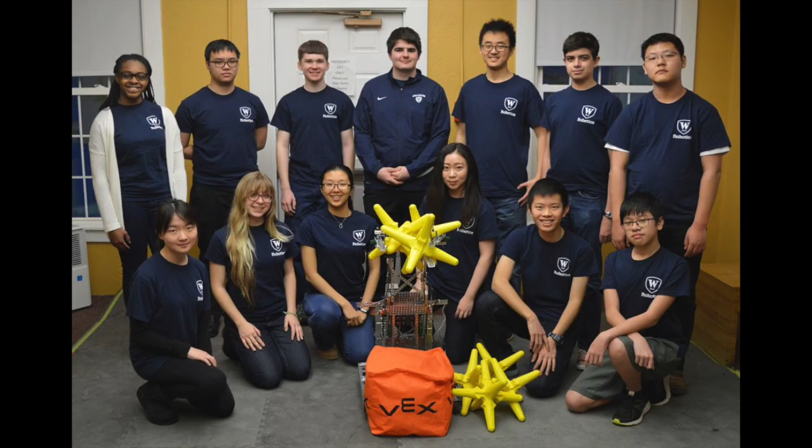Hi, my name is Kome Kadoya. I am the leader of Team 3157, the Williston Northampton School's robotics team, based in Easthampton, Massachusetts.

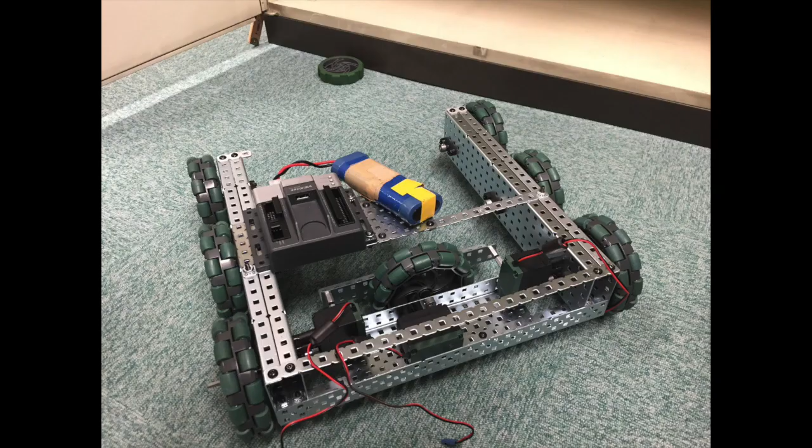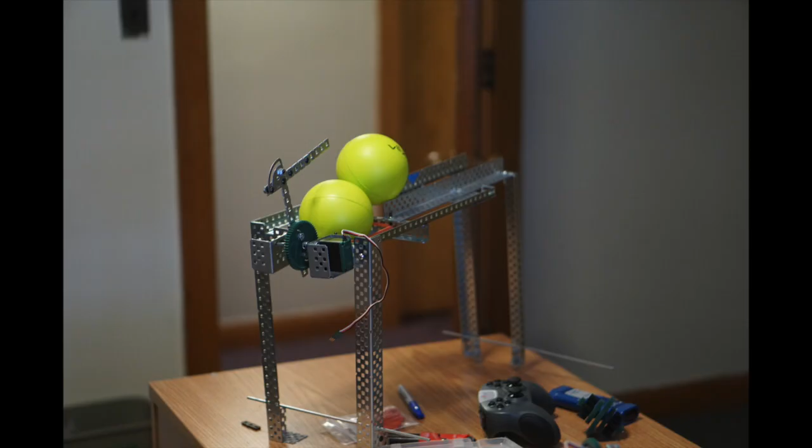Nothing has had a greater impact on my life than Vex Robotics. My involvement in Vex for the past 6 years has taught me so many valuable skills that I could not have learned anywhere else, and it has shaped my future. This is why I wanted to share our team's journey to the World Championships and explain how it helped me discover my passion for engineering and robotics.

My first experience with Vex came in 7th grade when I gathered a few of my friends to start a robotics club at my middle school in Japan. With only a clawbot, we signed up for the only competition available to teams in Japan, the Asia Pacific Regionals.

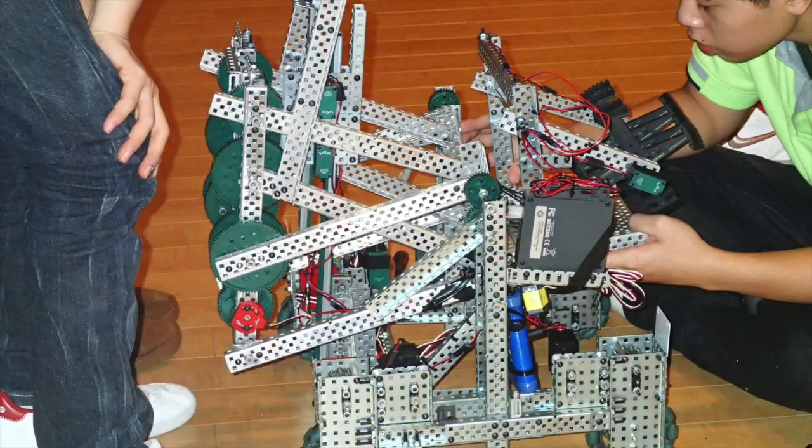As you can imagine, most of the teams in this high school regional competition had amazing robots that could accomplish every task in the game quickly and reliably. I was astonished at the amount of complex problem solving that could be done with such a simple set of parts. At this moment, I told myself that one day I would get to the World Championships.

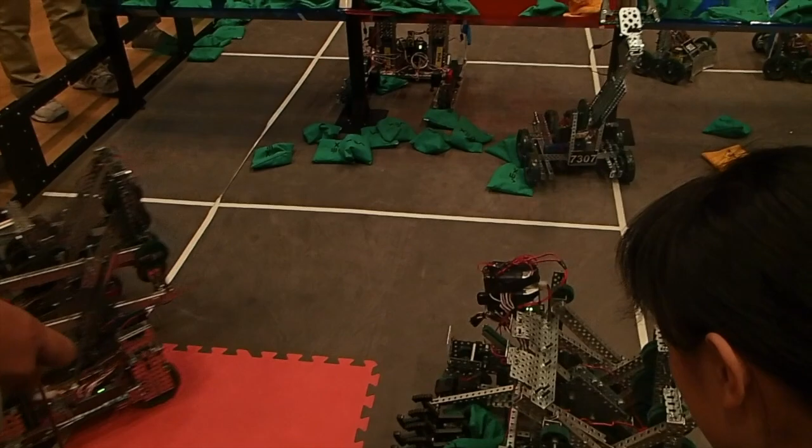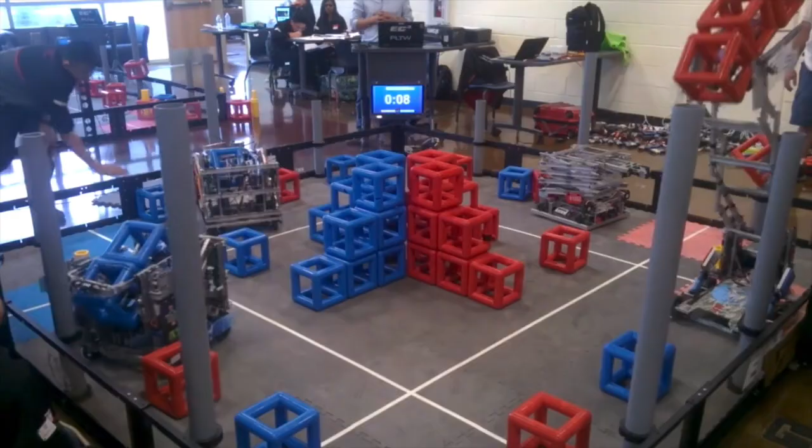Fueled by this new goal, I came back next year with a bigger team, and every day after school for a few months, my team and I designed and created a robot for that year's game, Skyrise. I learned so much about the different kinds of lifting mechanisms and how each one expanded and contracted to fit inside the 18-inch box that the robot had to start in, while also building amazingly tall skyrises.

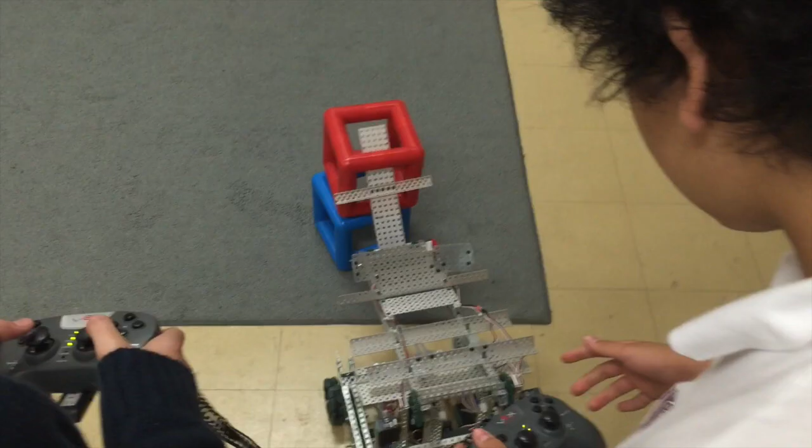I also started to grasp the basics of programming in RobotC, and although we failed miserably due to our motors overheating at competition, I learned a valuable lesson in understanding the strengths and limitations of our hardware, and the importance of consistency and reliability.

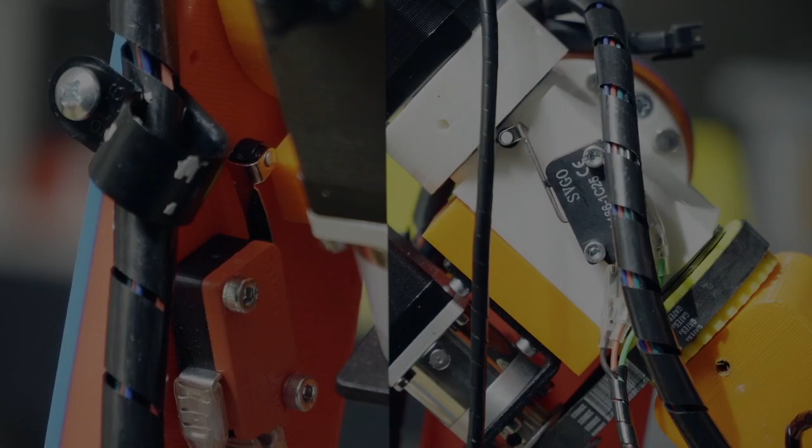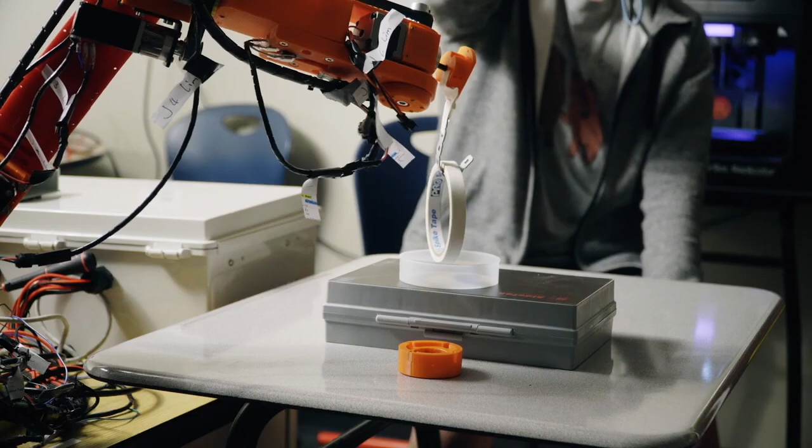My first 2 years involved in Vex were enough for me to decide on engineering as my future profession, and the experience set me up very well when I came to the US to attend high school. As the high school I attended had just switched from FRC to Vex, my first year there, I was able to help introduce everyone on the team to Vex.

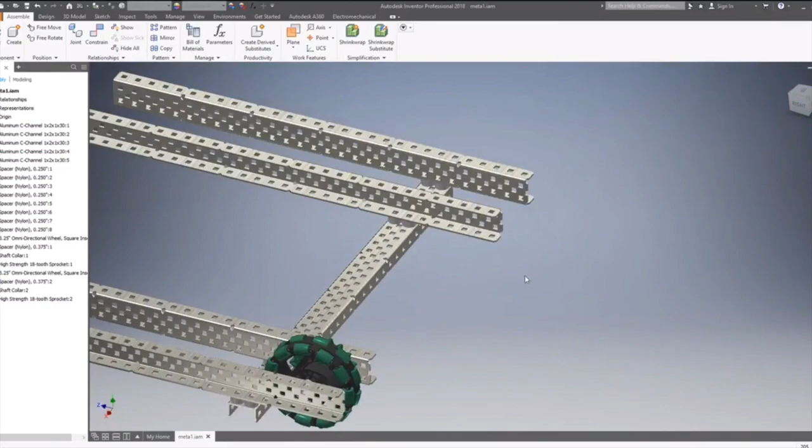This was also the first year I started to use CAD software, which I found to be a far better way of communicating robot designs compared to simple drawings. We found that making virtual designs and making changes in CAD would be a valuable tool, as we didn't have to physically build or cut anything, and we could easily revert back if we didn't like a change we made.

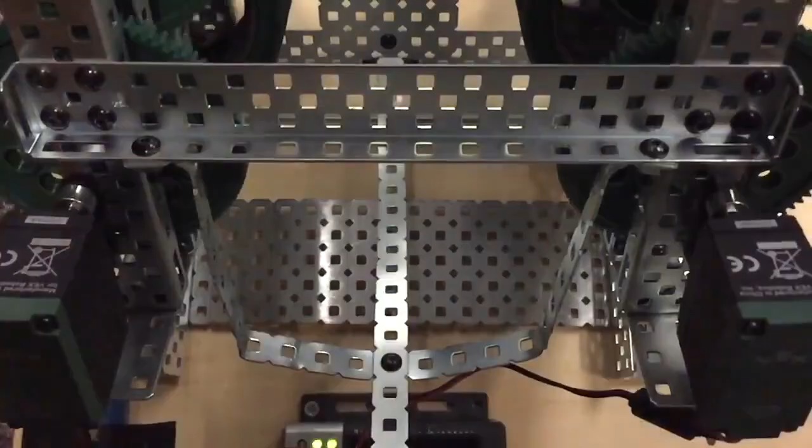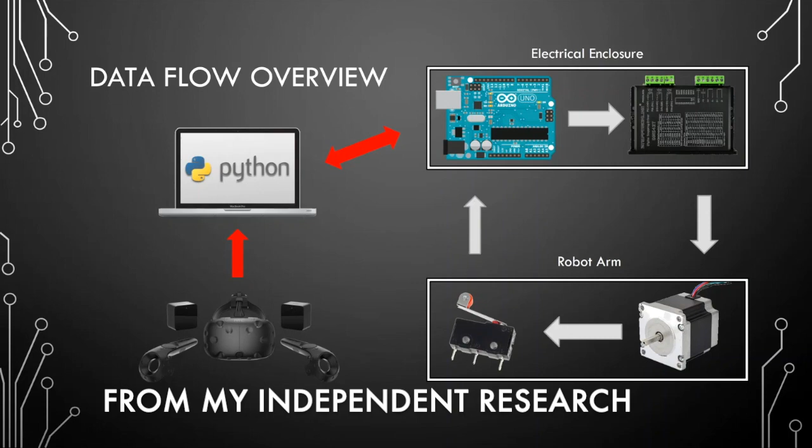Although the robot we took to competition had been a big improvement compared to last year, it was still not enough to qualify us for the Southern New England Regionals, the first step in getting to the World Championships. One of the most valuable things I have learned from Vex, however, is that I love solving problems with solutions that involve both hardware and software.

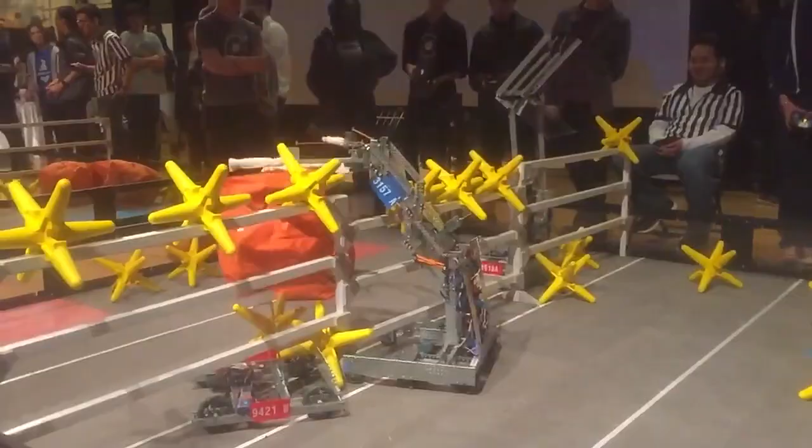I came to this realization in the following year's game, Starstruck, where stars and cubes had to get carried over a fence to the opponent's side. The solution our team ended up with was a grabber with 3 prongs where the 2 outer arms would be powered. The only way I knew how to program this mechanism was to have the motors be continually powered while the objects were being grabbed. Without that, the objects would fall.

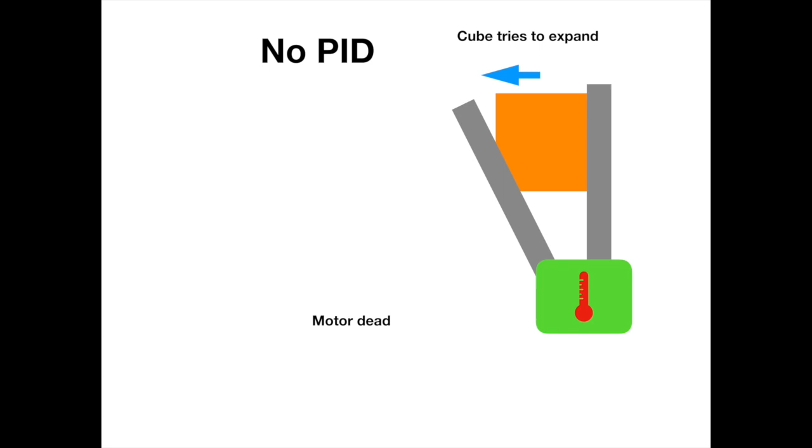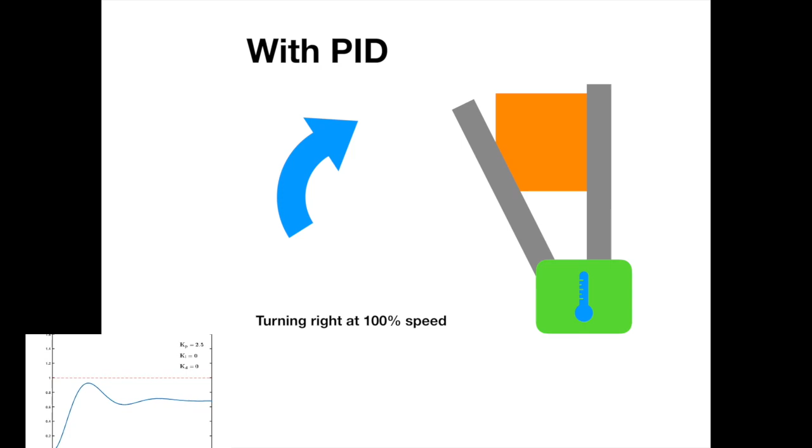This, however, meant that the motors would overheat during the matches, as they were trying to move in a direction they could not move in. Here, I learned the crucial programming concepts of closed-loop systems like PID, which allowed me to set an angle for where I wanted the arm to be, and the motor would dynamically adjust to provide just enough power to keep the arm at said angle.

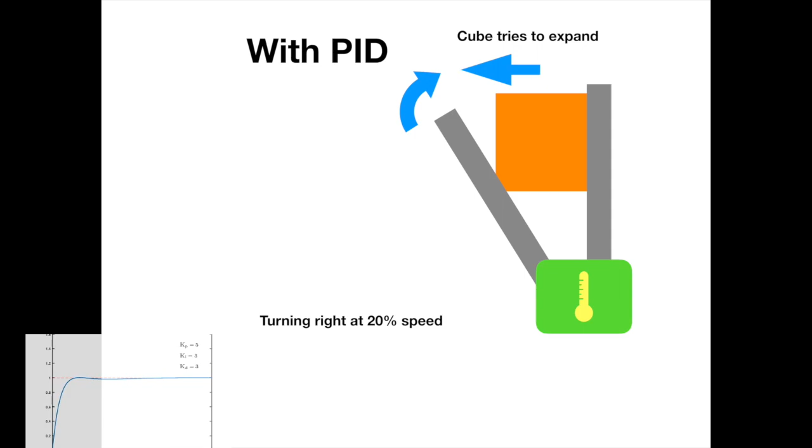This allowed the motors to stay operational for much longer, and this PID controller, combined with our unique hardware, allowed us to accomplish something not many other teams could do: the double cube grab.

We got 2 at once! I want to see 2 cubes at once! Oh my god, we're going to see 2 cubes at once! Are we going to see it? We're going to see it! Oh my god! That is great!

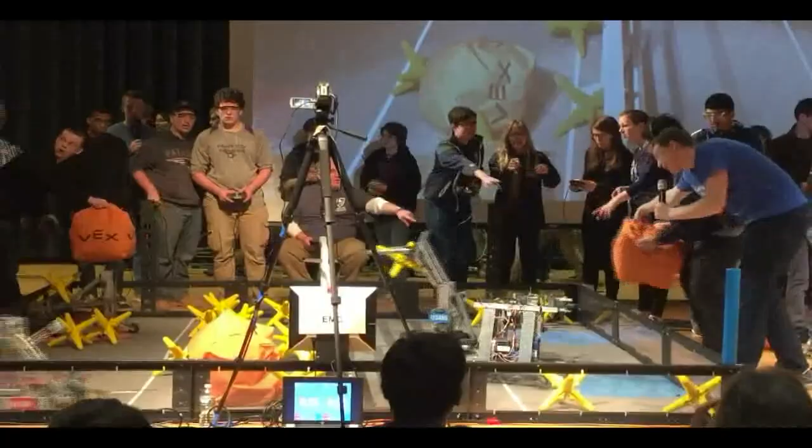Oh, no. This year, for the first time, we had become tournament champions in a qualifier match, which allowed us to advance to the Southern New England Regionals, and although we didn't qualify for Worlds there, we had our first taste of success.

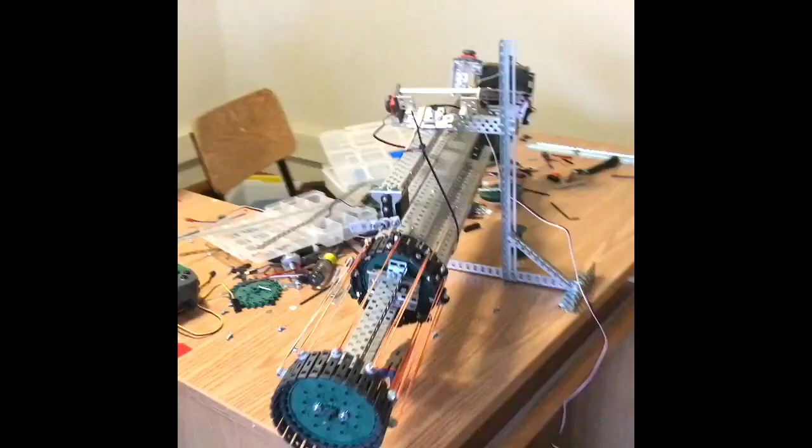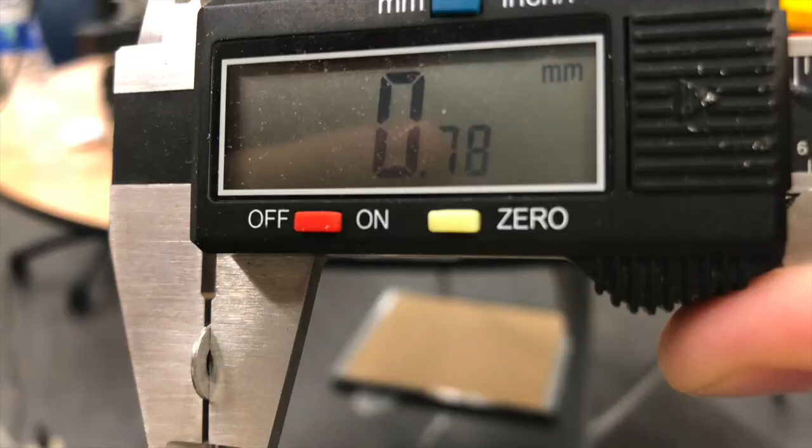Being part of a Vex team had allowed me to understand what specifically about engineering had interested me. Although I had looked into majoring in mechanical engineering, electrical engineering, or computer science, I realized that I had done a little bit of everything in my Vex career, and I wanted to learn more about all of them.

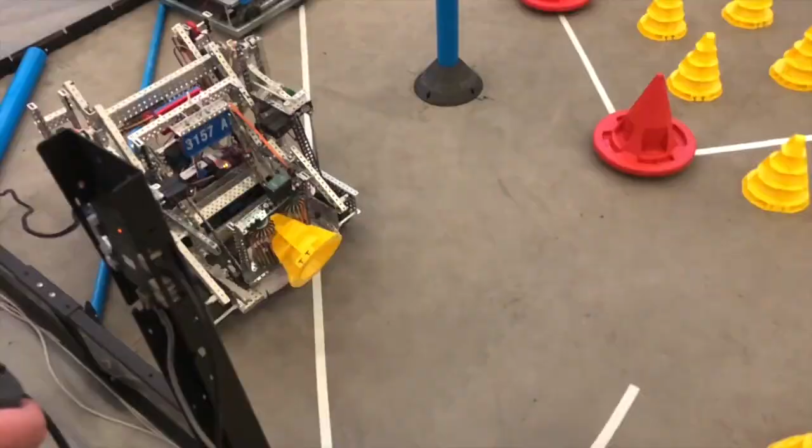There is no clearer example of this than in my junior year, when our team used a combination of hardware, sensors, and software to tackle the challenges that the game provided. That year's game, In the Zone, involved stacking cones onto mobile goals, which could be scored into zones in the corners of the field. During the 15-second autonomous period, I used sensors like the touch, encoder, ultrasonic, and line tracking to ensure that the motion of the robot during this period would be reliable.

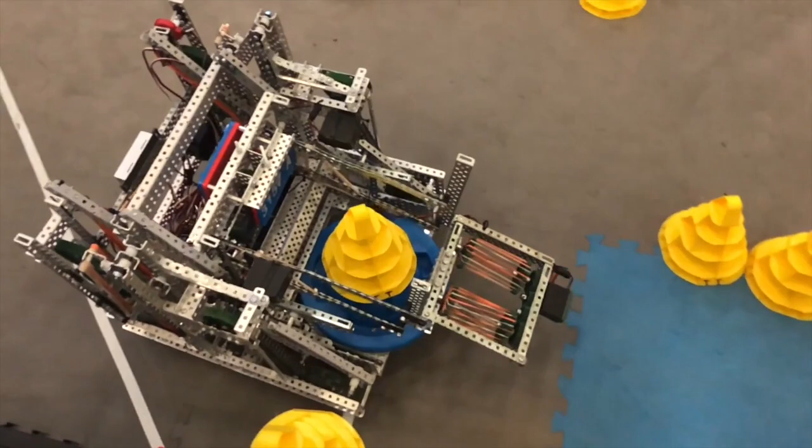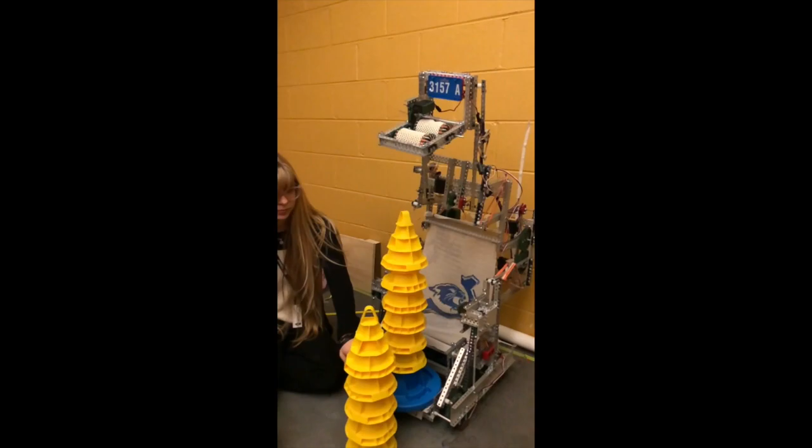Also, combining encoders, PID loops, and multi-threaded execution of our program allowed our driver to hold down one button while the robot would automatically create a stack of 11 cones. Working on this robot was so rewarding as I saw that utilizing concepts from all three of the aforementioned majors had allowed me to solve this problem in such an elegant way.

This year, when we again qualified for the Southern New England Regionals, we got to ally with teams that had regularly qualified for the Worlds. I ended up hearing stories about the amazing experience of being with 18,000 other students who had worked on the same problems you have for the last few months. I was again determined to make it to Worlds before I graduated.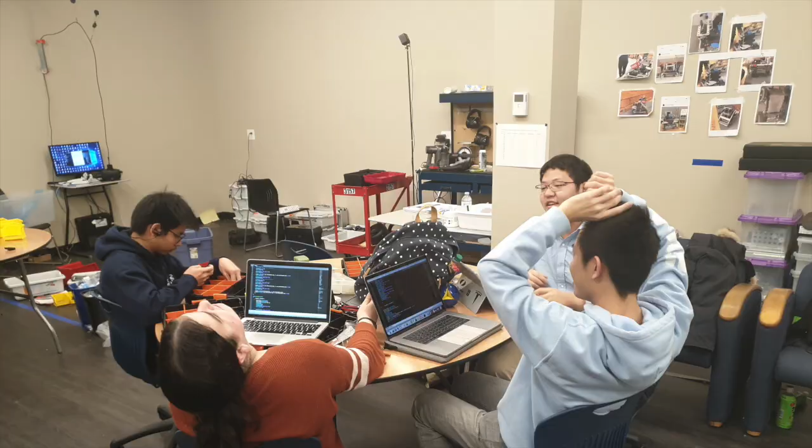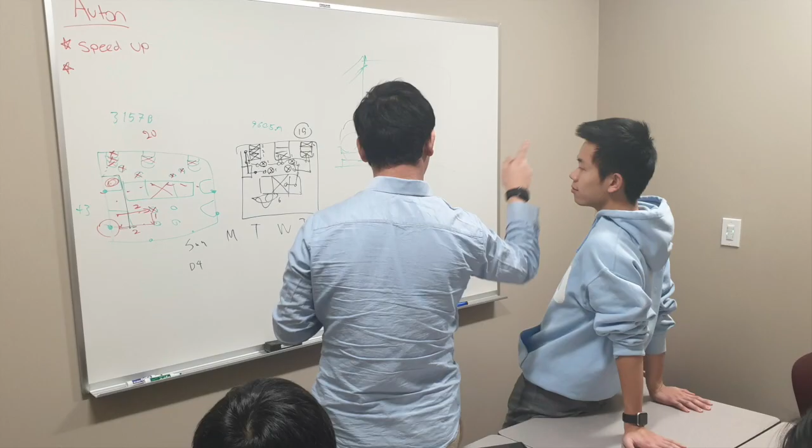With the goal of creating a team that could consistently get to Worlds, how I ran the team in my senior year changed. From creating different teams, some of which were dedicated to qualifying, while others were dedicated to passing down the knowledge to younger students, to making sure we had a clear strategy for getting to Worlds, we made several changes and I learned so many skills that would allow me to run and be part of engineering teams far more effectively.

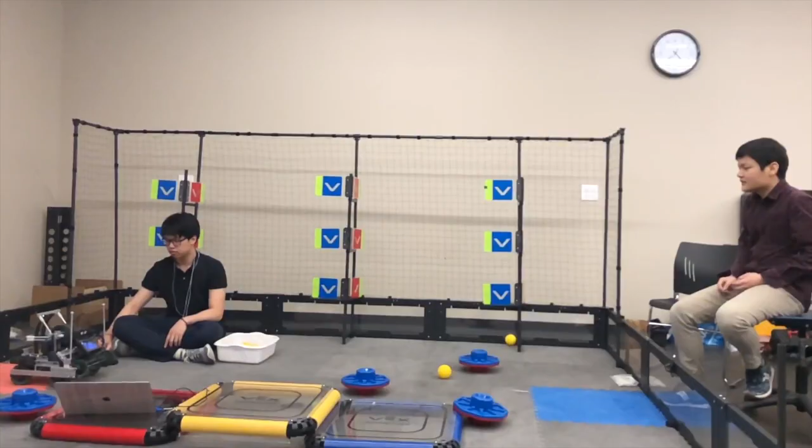This year the team was given a new lab to work in, which allowed students to spend more time on the robot. This, combined with our more ambitious goal, meant that we needed to keep track of which tasks had to be completed, who was working on them, and if the tasks were progressing at a good pace. For this, we created a Gantt chart and started an electronic engineering notebook. These tools allowed us to keep our ultimate goal in mind as we delved deep into the hardware and software.

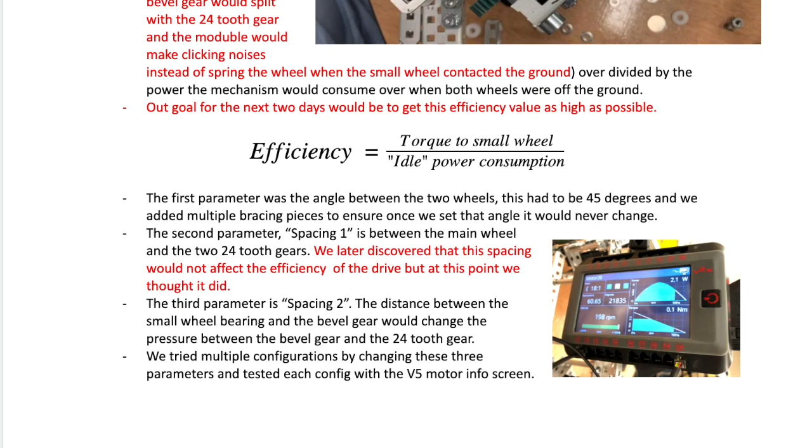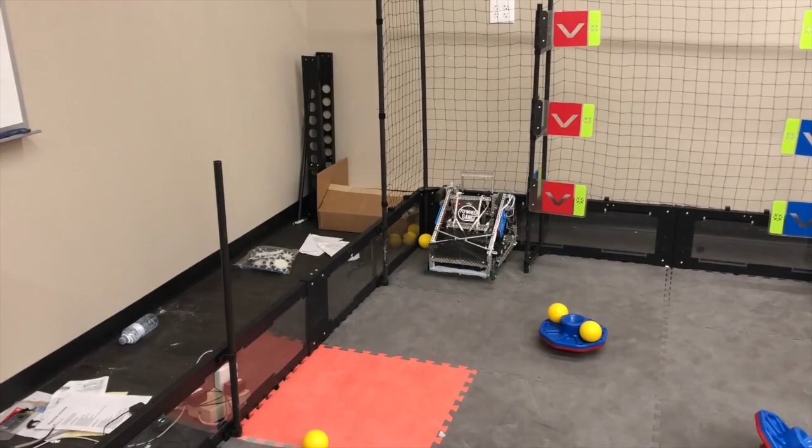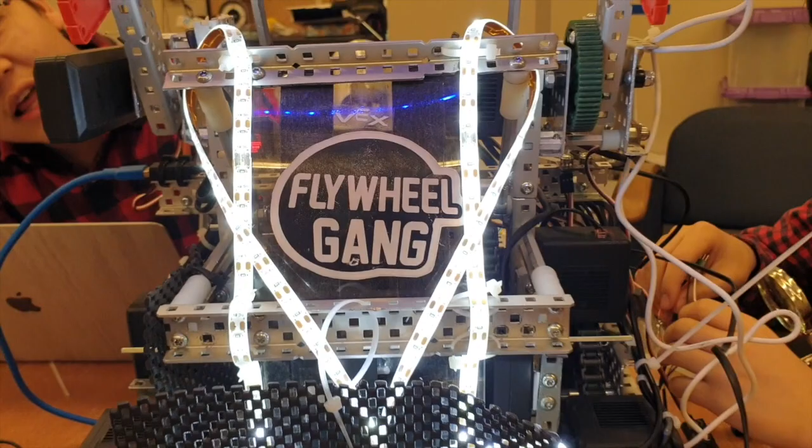This would be a perfect story if we qualified for the World Championships at this year's Southern New England Regionals, which will be held on March 16 and 17. However, whether we qualify or not, I still got so much from being part of the VEX Robotics competitions. Vex has helped me understand that rather than being confined to one field of study, a major like robotics at WPI will allow me to utilize mechanical engineering, electrical engineering, and computer science concepts to more effectively solve problems.

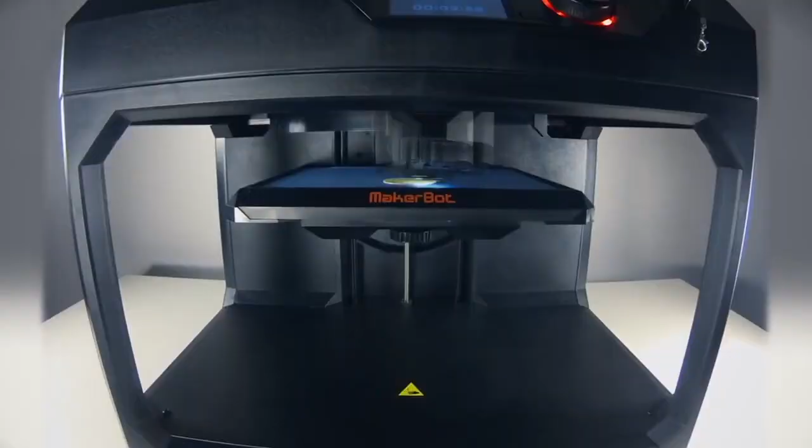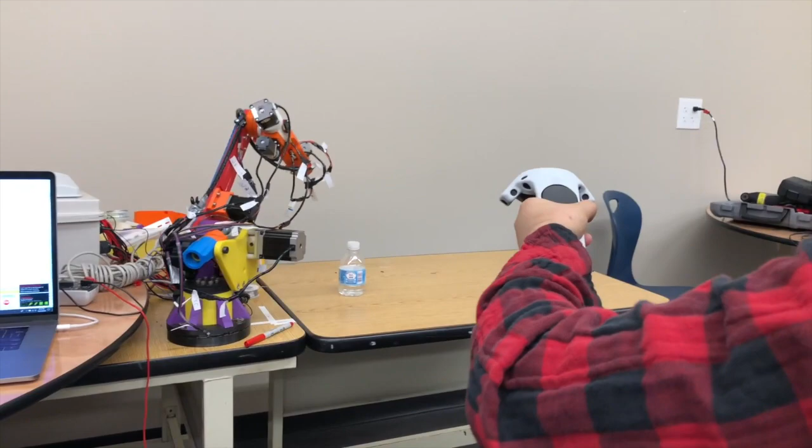And although the plethora of technical knowledge I have learned will be indispensable as I study to become an engineer, there are so many skills Vex has taught me that no class could ever teach. Planning out long-term projects, convincing others of the importance of your cause, motivating teammates, and persevering through challenging tasks and failure are all skills I developed because I was part of 3157. I am so grateful that I was given this opportunity, and I know that these skills will be a crucial part of my future. Thank you.